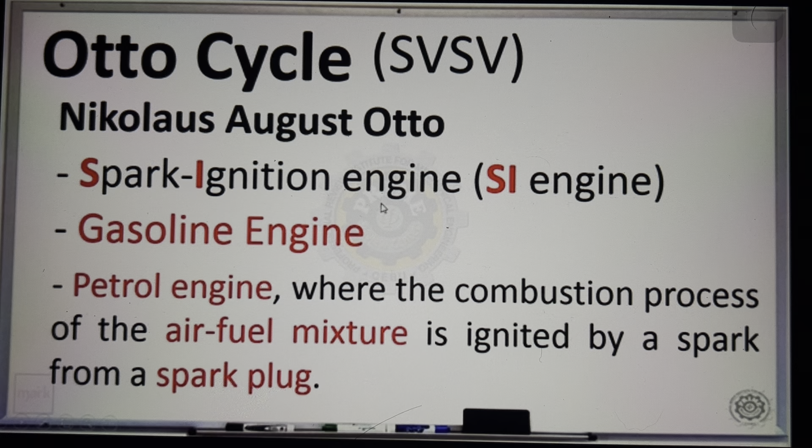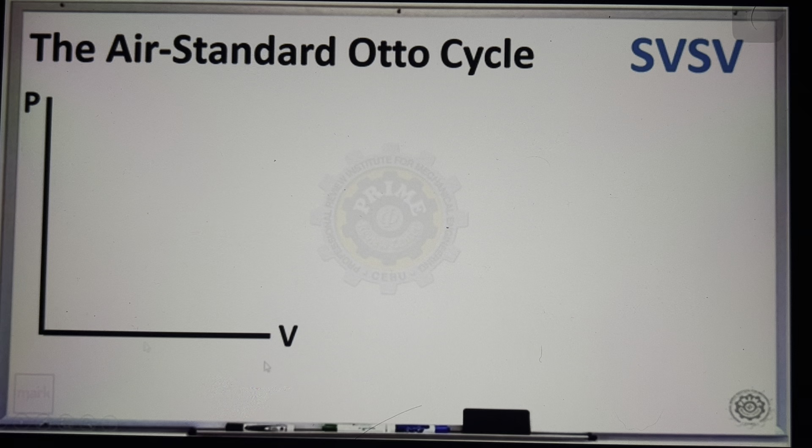1 to 2 is isentropic, PV raised to k equals C, isentropic, isometric, isentropic, and then isometric. So, ganito yung figure natin pag PV diagram. Okay, 1 to 2, that is isentropic, lumiliit volume, compression.

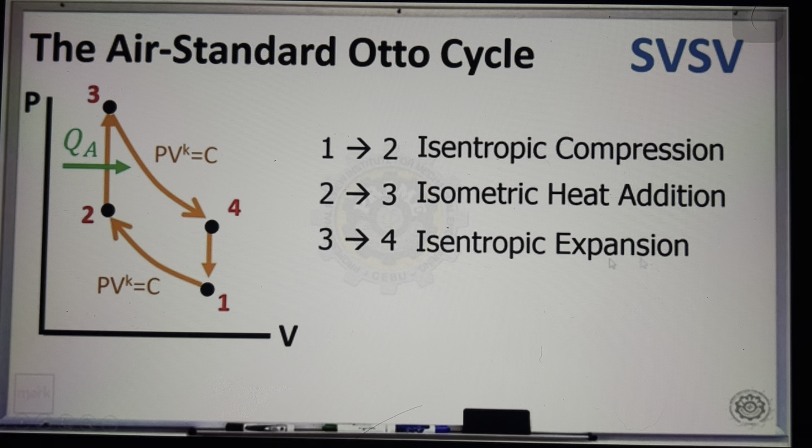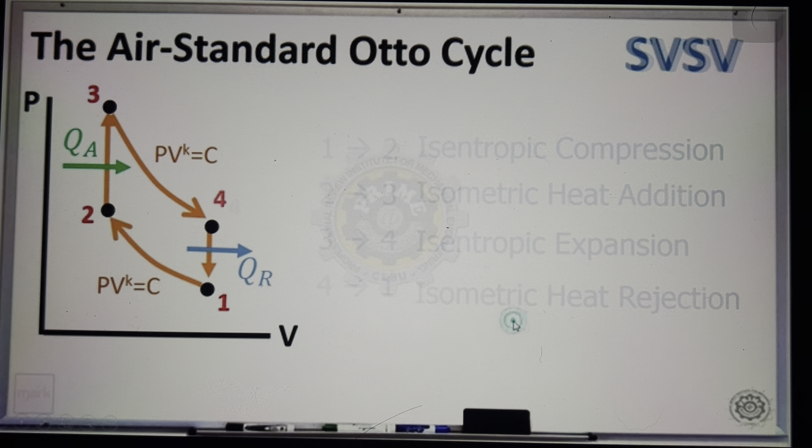Now, same formula tayo. Efficiency: output over input, work net over QA, 1 minus QR over QA. So, general formula. Paano makuha yung Q kapag Otto cycle? Tingnan yung process. Yung process natin ng heat addition, constant volume. At ang formula ng Q pag constant volume is mCV delta T. Be specific na kagad sa temperature difference, T3 minus T2. So, mCV (T3 minus T2).

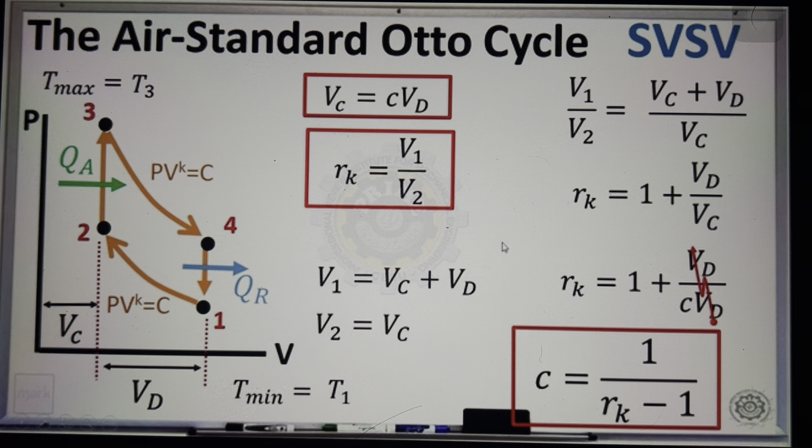At the beginning of the compression stroke of an ideal Otto cycle, it has an air pressure of 15 psi, a temperature of 75 Fahrenheit, and a specific volume of 13.2 cubic feet per pound. At the end of the compression, the specific volume is 1.76 cubic feet per pound.

The heat supply to the cycle is 352 BTU per pound. Calculate the following. So, obviously, ang given is beginning. So, nagbigay ng beginning ng compression. Okay?

So, beginning ng compression. Tapos, ang meron dito is 15 PSI. Since beginning nga yan, so ibig sabihin yung 15, this is our P1. Yung temperature na to, ito yung T1. And then, this is specific volume ha, specific volume. So, small v yung representation, specific volume 1.

At the end of the compression, binigay yung specific volume 2. So, specific volume 2. And then, meron tayong heat supply. Ang unit niya per pound. So, ibig sabihin, specific heat ito, QA. Now, we try to solve the following. Una, ang tinatanong is compression ratio. Ang symbol natin doon is RK.

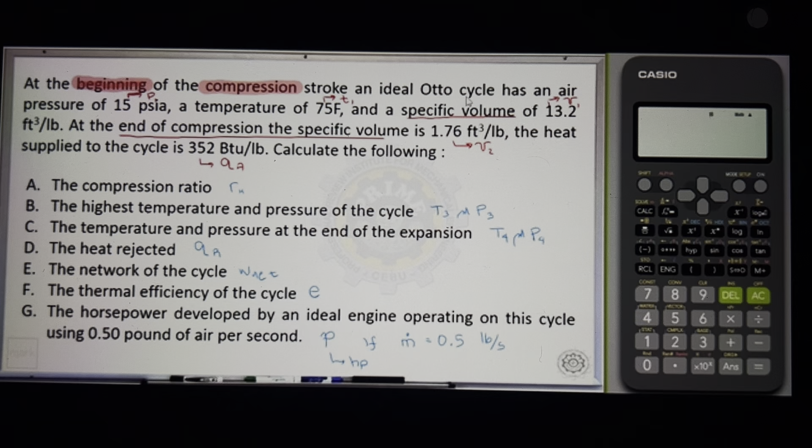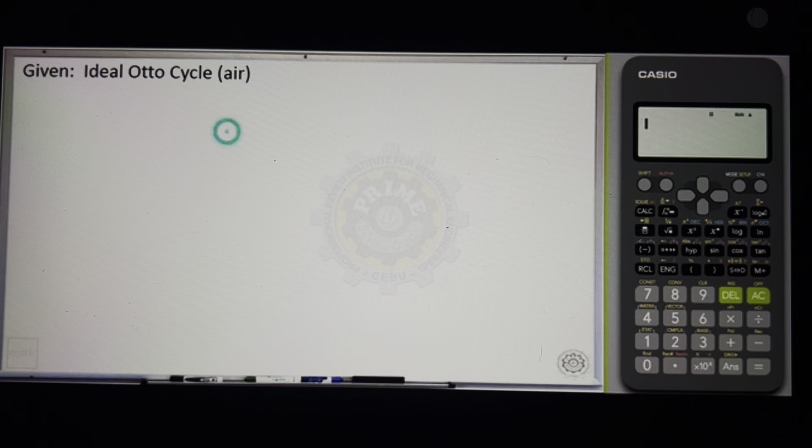So, para sagutan yung problem, magsimula kayo sa PV diagram. You draw the PV diagram ng ideal Otto cycle. Isulat nyo yung mga given correctly. Then, tsaka natin to sagutan. Okay, so kailangan natin i-drawing yung PV diagram para magkaroon tayo ng guide. So, again, hopefully kabisado natin yung mga PV diagram ng mga cycle. So, this is for an Otto cycle.

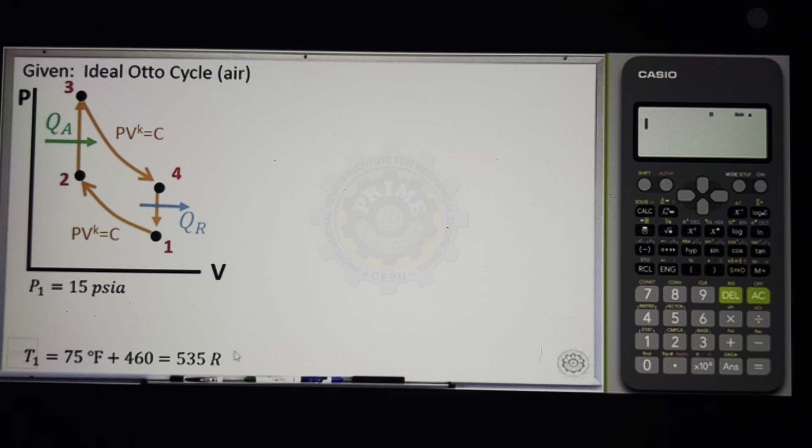So, given sa atin yung P1, yung temperature 1, ginawa ko na siyang absolute. Okay, kasi yung solution natin parating absolute yung temperature doon. So, 75 plus 460 is 535. Specific volume 1, specific volume 2, QA. And then, sagutan natin yung mga requirement. Okay, una, kunin natin yung compression ratio. Again, ang formula lang ng compression ratio is ratio ng maximum volume over the minimum volume. So kita naman, this is maximum volume, ito yung minimum volume. So yung RK natin is specific volume 1 over specific volume 2.

Pwede rin capital V ang gamitin, actual volume kung sakaling given. Pero kung hindi given yon, pwede ratio ng specific volume. So substitution, okay, so we have 13.2. Hindi ko na ilalagay yung units, magka-cancel out lang naman yon. And then 1.76. So use our calculator, makuha na natin yung RK. So ratio lang yan ng maximum volume 13.2 over minimum volume na 1.76. So ang compression ratio is 7.5. So RK is 7.5.

Okay, next. How about T3? Paano makuha yung temperature 3? Now, para makuha yung temperature 3, gamitin natin yung QA. So, formula natin ng QA is this. QA, nangyari yan sa constant volume. So, this is mCV delta T. Ang delta T natin dyan is T3 minus T2. Since ang given na QA is specific, ibig sabihin nun, yung mass na gagamitin should be 1, kasi specific heat yung binigay. So, this must be 1. Okay, analyze. QA is given, CV is constant, nawawala yung T3, so kailangan masolve mo muna yung T2.

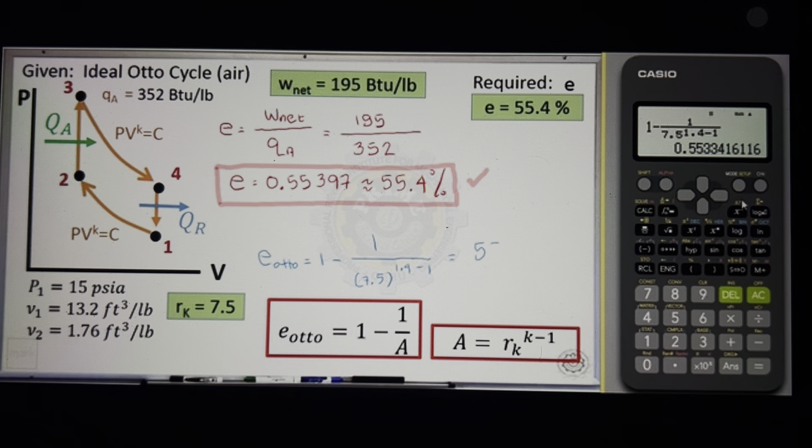So efficiency ng Otto. Okay, efficiency ng Otto cycle. Other solution is 1 minus 1 over A. Ang A natin is RK raised to K minus 1. So mas maiksi yung solution na ito, tsaka mas madali. So kabisaduhin natin. So 1 minus 1 over 7.5 raised to K minus 1. Equal sign, you get the same result na 55.4%. So mas maganda kung alam din natin yung mga shortcuts.

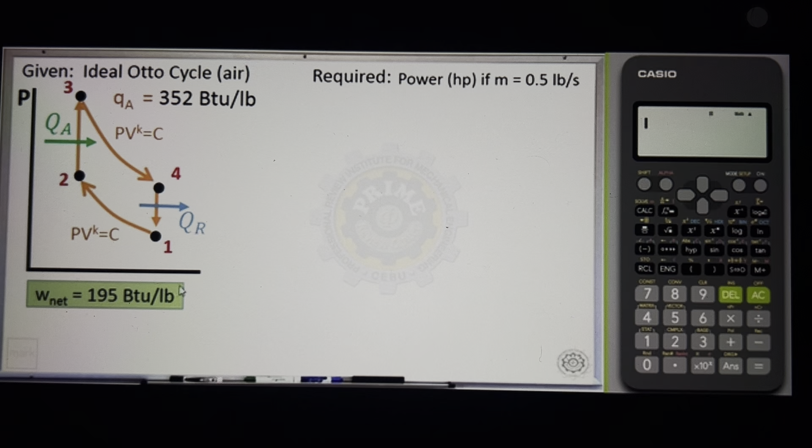Okay, last problem regarding sa Otto cycle. Okay, paano makakuha ng power if the mass flow rate is 0.5 pound per second? So since meron na tayong specific work, pwede na tayo makakuha ng power pag nag-multiply tayo dito ng mass. Kasi by unit analysis, magka-cancel out yung pound dito. So ang formula ng power is mass multiply ng specific work net. So given yung mass, na-solve yung specific work net, then you will have power. Kaya lang pag nag-unit analysis ka, kailangan mapalabas natin yung HP.

So ang mass flow rate is 0.5 pound per second. Yung specific work natin is 195 BTU per pound. So mag-cancel out naman talaga yung pound. So ang natirang unit is BTU per second. So kailangan to maging HP. So sana kabisado yung conversion. So pwede tayong mag BTU per hour or kaya BTU per minute.

For example, gusto natin BTU per hour. So 1 hour is 3,600 seconds. Cancel out yung seconds. Okay, another conversion is 1 HP equivalent sa 2545 BTU per hour. So yung mga conversion factor natin, tinuro naman lahat yan sa thermodynamics. So mag-cancel out yung oras, mag-cancel out yung BTU. So ang matitirang unit na lang dito is horsepower.

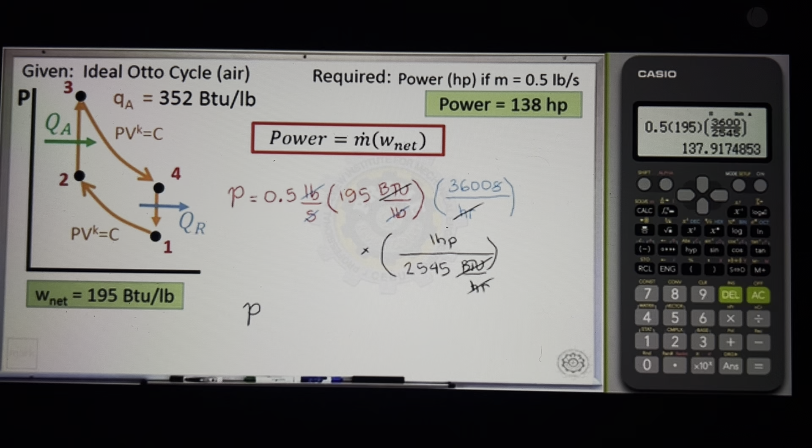So calculate na natin. So you have 0.5 multiply sa 195, multiply sa 3600, i-divide natin ng 2545. So yung 3600 tsaka 2545, conversion factor lang yan. Then makuha na natin yung final answer. So yung power is approximately 138. So power is 137.9, approximately 138 horsepower.

Okay, so that's it. Practicein natin yung Otto cycle. Laging magsimula sa PV diagram and yung mga formula. Make sure lang na marunong parati sa unit analysis.